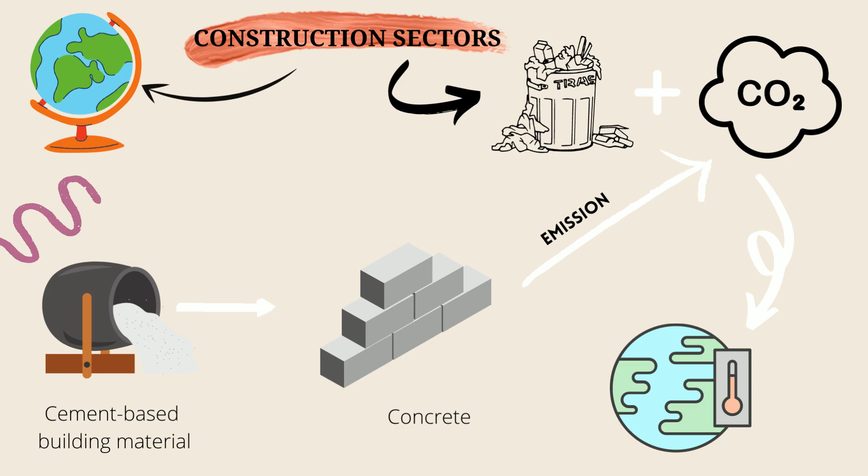It is estimated that 2 billion tons of greenhouse gases are emitted each year from cement manufacture, which accounts for around 6% of the world's anthropogenic greenhouse gas emissions.

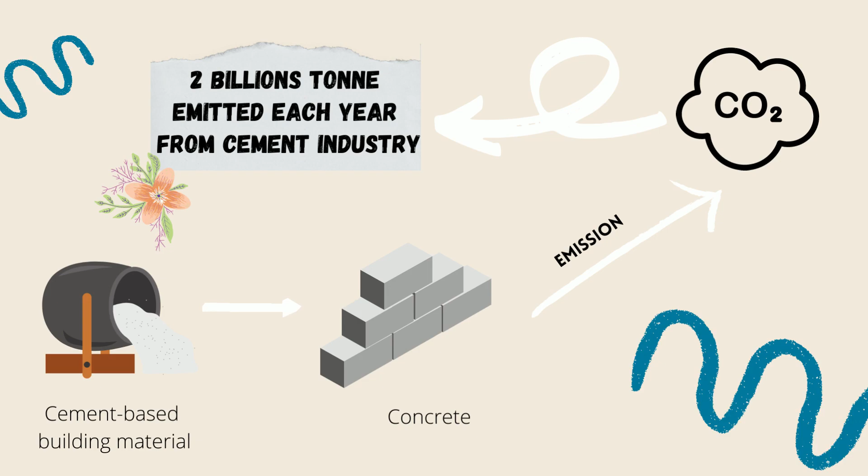In 2020, carbon dioxide emissions for Malaysia were 262.2 million tons. Over the last 50 years, carbon dioxide emissions for Malaysia grew substantially from 14.6 to 262.2 million tons. Since the rise of urbanization in recent years, cement production gives a negative impact to the environment.

Here is the basic concept of geopolymer concrete. Geopolymer concrete is a type of concrete that is made by reacting or dissolving aluminate and silicate material with an alkaline activating solution, which are sodium silicate and sodium hydroxide, and subsequently polymerize into a molecular chain and become a binder.

It uses precursor or aluminosilicate source material either from natural or industrial byproducts such as fly ash, ground granulated slag, metakaolin, and silica fume. The first phase of alumina is to create fast setting time, while the second phase of silica is to create strength. Geopolymer concrete is cured in an oven or at ambient temperature, unlike OPC, which is cured in water.

Geopolymer concrete can be called eco-cement, as eco stands for economic element due to no cement involved for the production, as well as no hydration process as there is no water addition to it.

The advantages of geopolymer concrete are it has high compressive strength, which has been found to be up to 60 to 70 megapascal after 28 days. The concrete gains its compressive strength rapidly and faster than ordinary Portland cement.

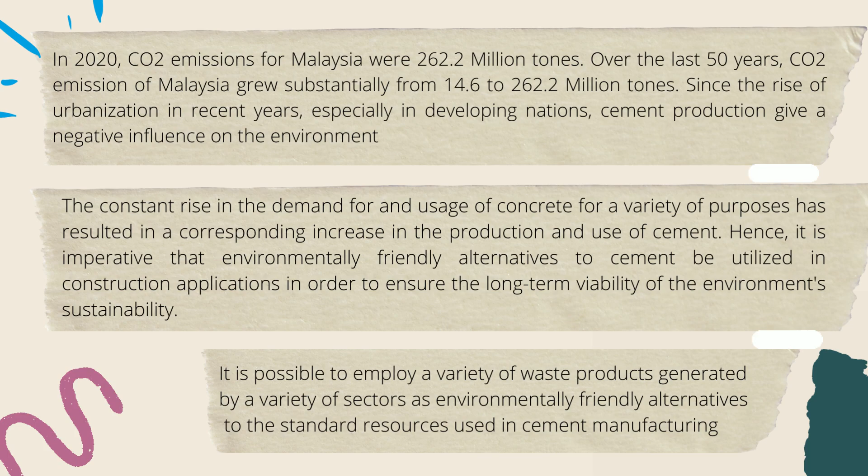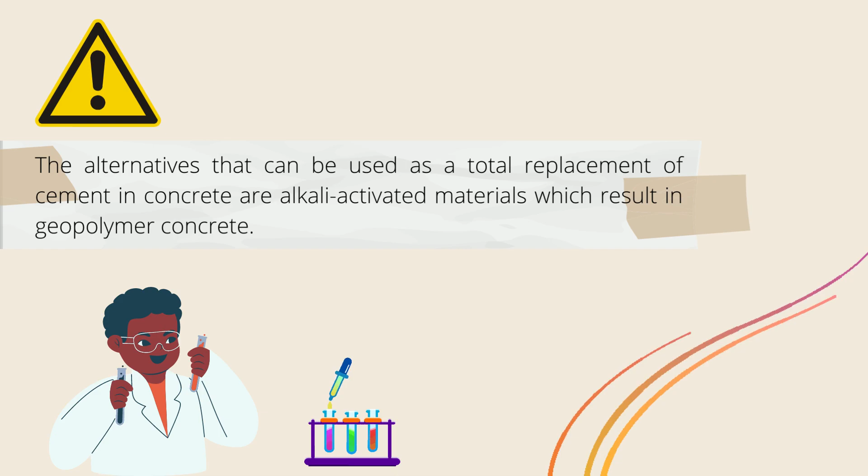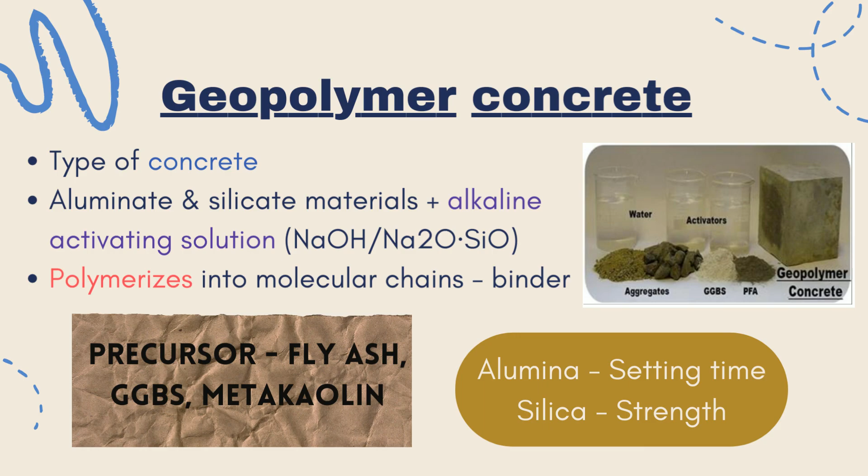What are the properties of fly ash geopolymer concrete? The first property is workability. The inclusion of fly ash in the blend develops the slump rate. The greatest slump rate was reported when using fly ash. The workability of geopolymer concrete is reduced with higher concentrations of sodium hydroxide solution.

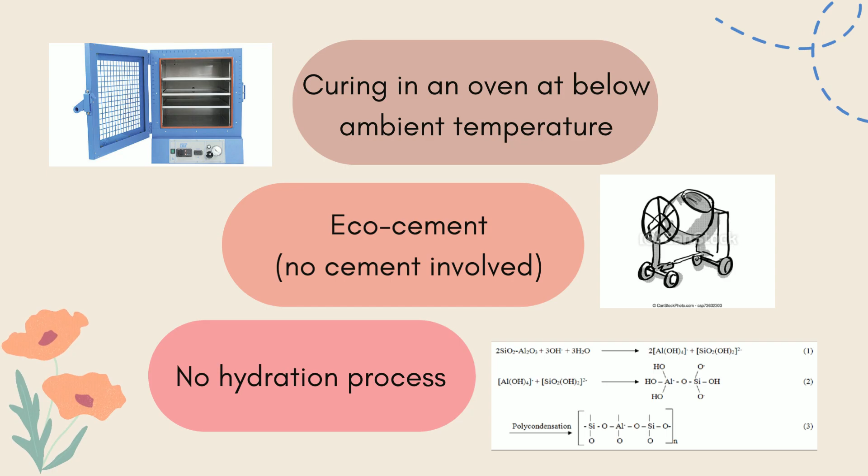High workability was achieved because of the spherical grains and glassy surface of fly ash, which is finer than cement and gives higher workability of geopolymer concrete. The second property is setting time. The results indicate that the fresh geopolymer concrete had a lower setting time of 28 to 58 minutes due to the presence of high calcium content of fly ash.

The setting time is lower because the geopolymer concrete with fly ash hardens faster than other cement. The third property is compressive strength. When fly ash is used as a binder, the compressive strength is increased with a higher molar concentration of sodium hydroxide. The activation of the reaction of the internal silica and alumina components is caused by the increased breakage of the glassy chain of fly ash, which is itself provoked by the high alkalinity resulting from the increase of the molarity of sodium hydroxide. The use of fly ash as a precursor can enhance the compressive strength of the geopolymer concrete.

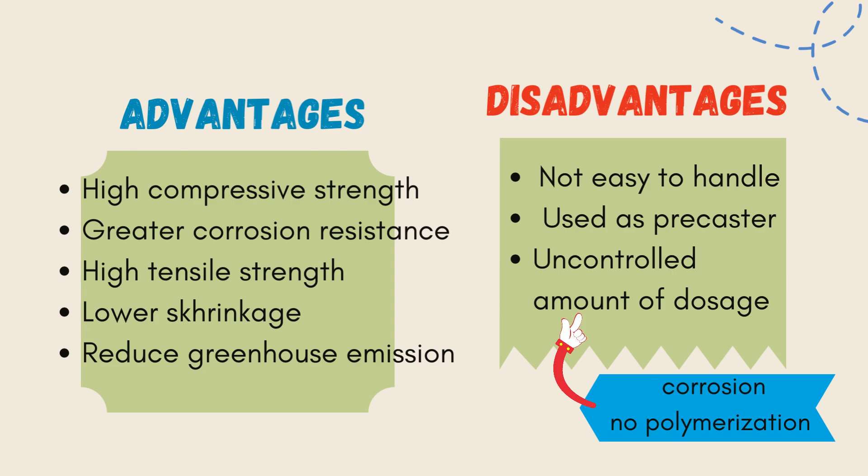Design procedure of fly ash geopolymer concrete. Fly ash was activated by using 3 different dosages of sodium hydroxide solution. The specimens were constructed using a Hobart mixer by dry mixing of fly ash and fine aggregates for 2 minutes, then mixing the alkaline activator with the water for about 3 minutes. The mixed mortar was then placed in a mold with the dimension of 50 x 50 x 50 mm.

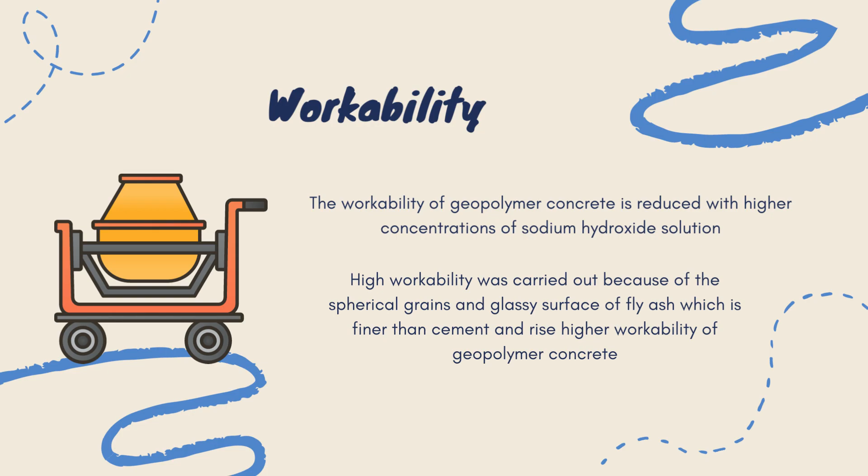Seal the specimen with vinyl to prevent the evaporation of water during the high temperature curing process. Cure the specimen in an oven at 60 degrees Celsius for about 24 hours. After that, air dry cure the specimen at ambient temperature for 24 hours prior to stripping. The fresh properties of geopolymer mortar were investigated by using a mini slump test. Test specimens were prepared to determine the compressive strength at curing ages of 1, 3, 14, 28, and 91 days in an oven and in air.

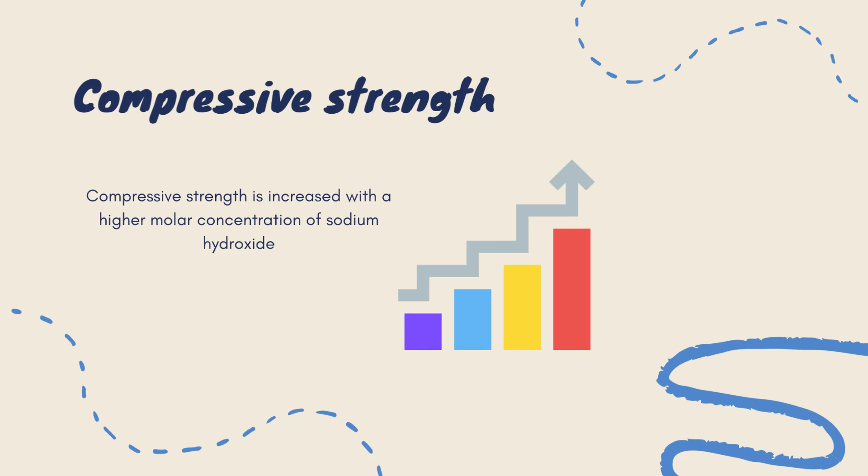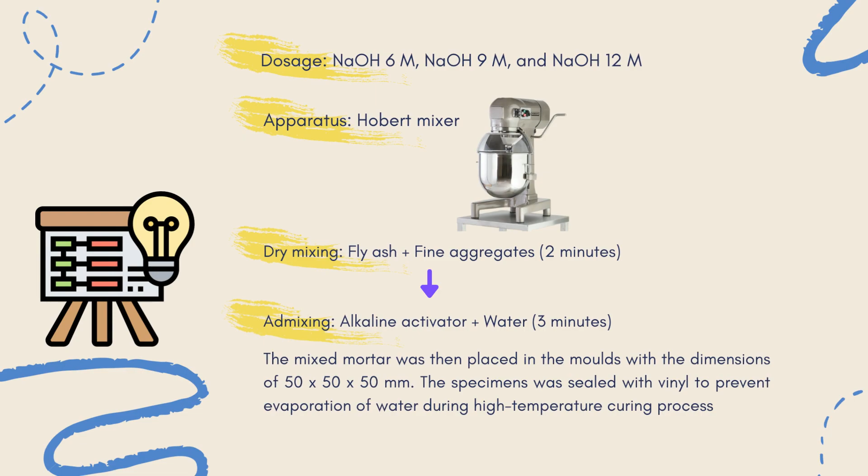Moving on to the discussion based on the findings. In this study, fly ash was activated by using 3 different dosages of sodium hydroxide solution, which are 6, 9, and 12 M. M denotes the alkaline activator, which is generally sodium hydroxide, potassium hydroxide, sodium carbonate, or sodium sulfate, to accelerate reaction speed. Next, microstructure analysis was done to evaluate the effect of the molarity and the mix ratio of the alkaline activator on the compressive strength.

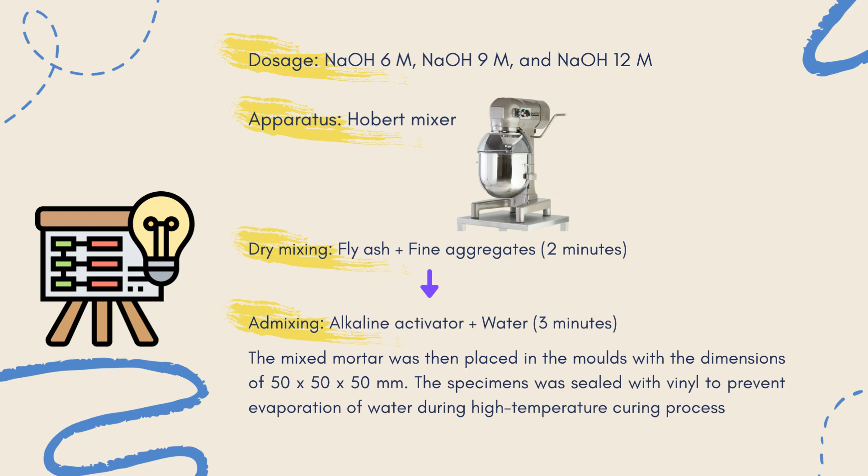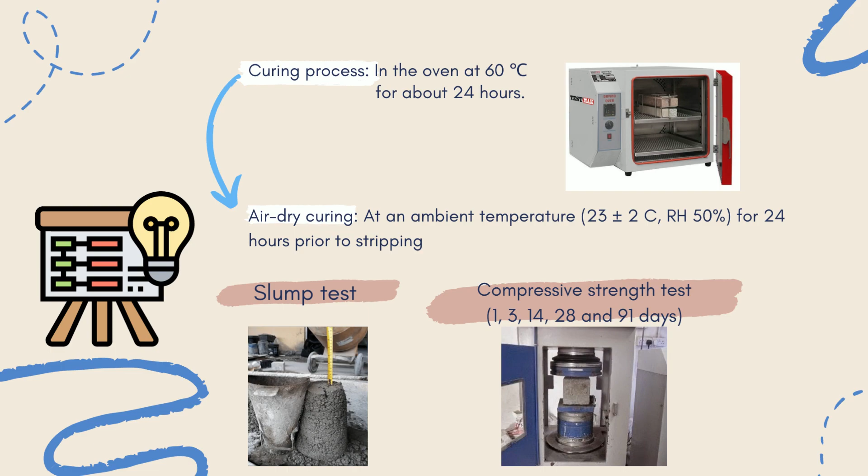Result and data analysis. For the slump test, the specimen with 6 mole concentration has 185 mm of flow, the second specimen has 183 mm of flow, and the third specimen has 180 mm of flow. For the compressive strength, the strength increases from day 1 until day 91. The specimen with 12 mole concentration has the highest strength compared to 6 mole and 9 mole concentration of sodium hydroxide. In conclusion, the higher the sodium hydroxide molarity, the higher the compressive strength and early strength. The mix of sodium hydroxide and sodium silicate with a mix ratio of 1 to 1 was shown to activate the geopolymerization of fly ash, achieving compressive strength of 47 megapascal, known as high strength concrete, which verifies the potential of fly ash as a replacement for cement.

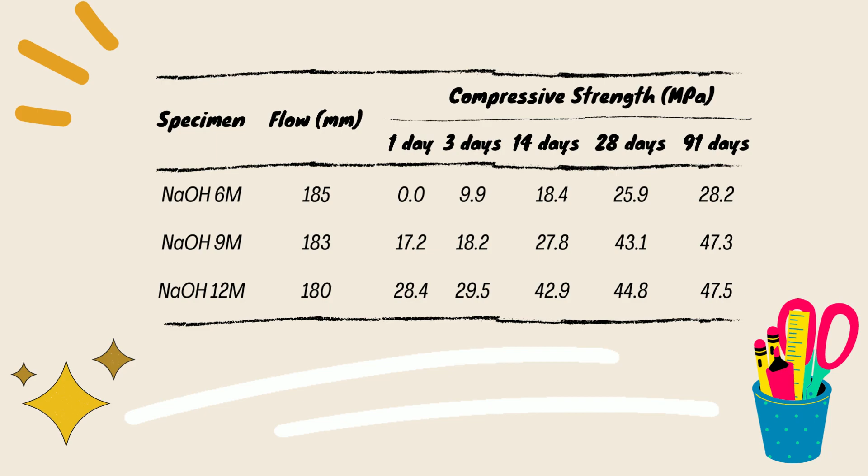However, this geopolymer concrete is more suitable for precast concrete because the compressive strength can be developed at temperatures that exceed 60 degrees Celsius.